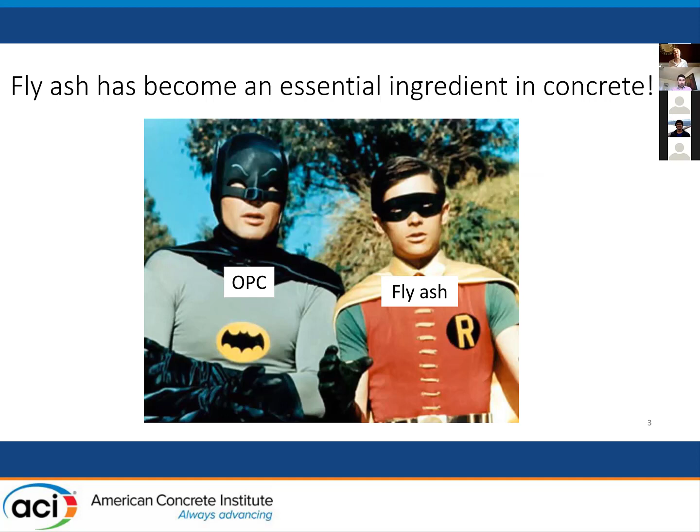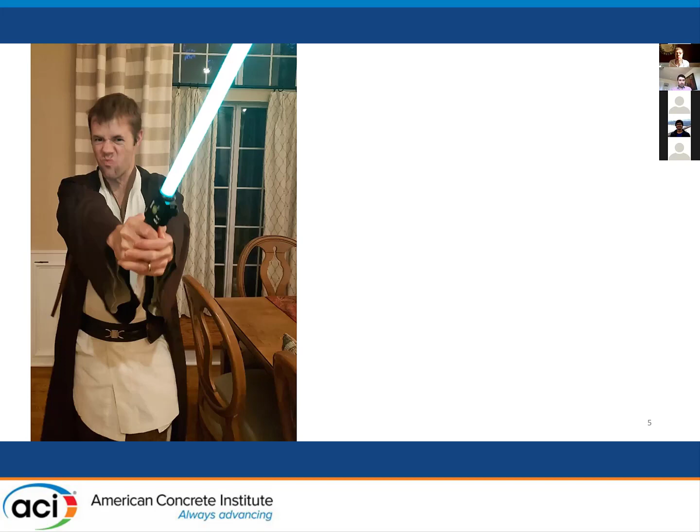So fly ash, as you know, is an essential ingredient in concrete. You could say it's like Batman and Robin, right? You could say it's like Han Solo and Luke Skywalker. And I have to warn you just a second that I'm a massive Star Wars fan. I have Jedi robes, I have lightsabers, I hang out with Wookiees, so you might see some more Star Wars coming up from me.

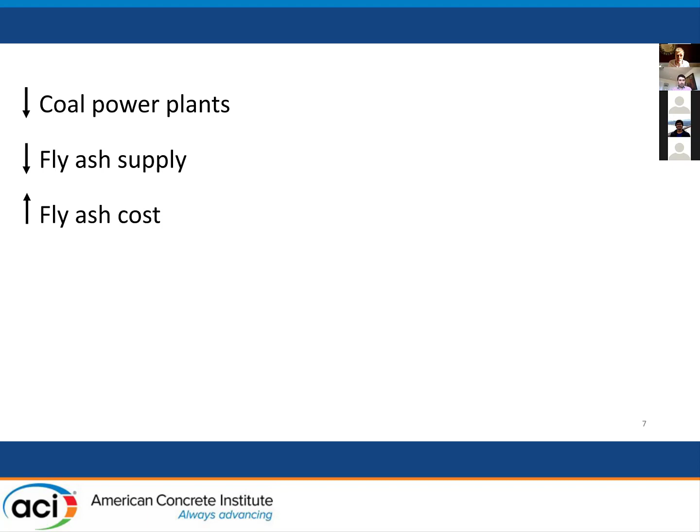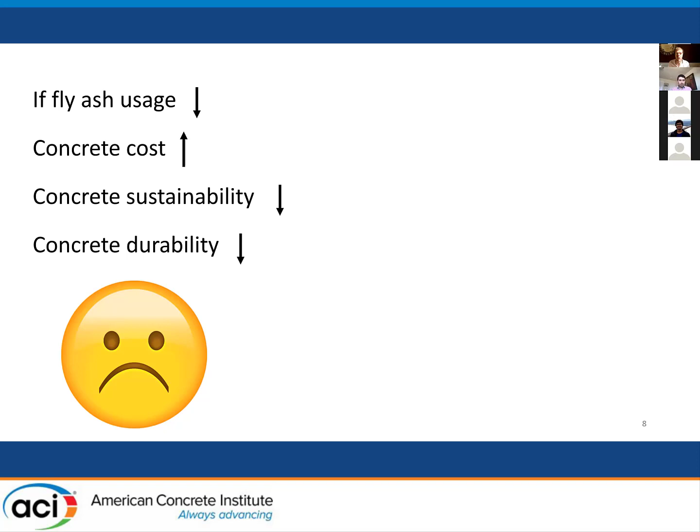But as you know, coal-fired power plants are going away. Fly ash supply is going down. Cost of fly ash is going up. This is scaring people, right? Fly ash usage has the potential to go down. This could make our costs go up, our sustainability go down, our durability go down. Oh, no, no. What are we going to do? This sounds scary and crazy.

Oh, no. You know, people out there are saying, you know, use other pozzolans, and I don't disagree with that. I think those are all good things. Slag, silica fume, natural pozzolan, calcined clays are great alternatives.

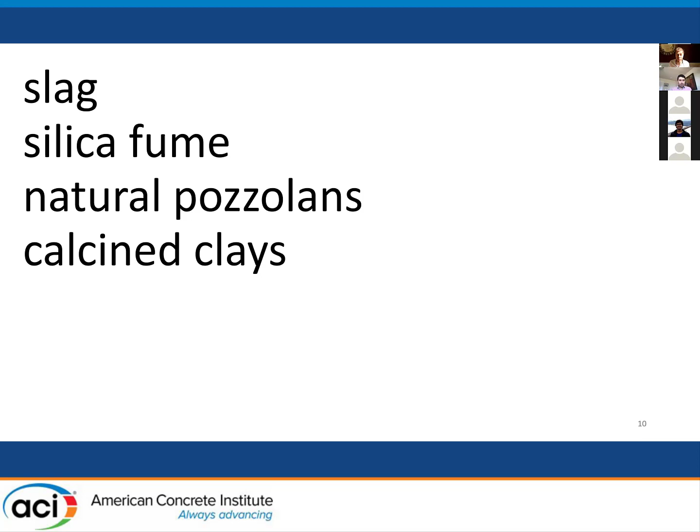But ladies and gentlemen, did you know we got something else? Did you know we got the backup fly ash out there? You know, the backup fly ash. What's the backup fly ash? Did you know the United States only uses about 40% of the fly ash that's being produced today, and it's been doing that for decades?

Tom Adams is going to talk more about this in the second session. Make sure you check him out.

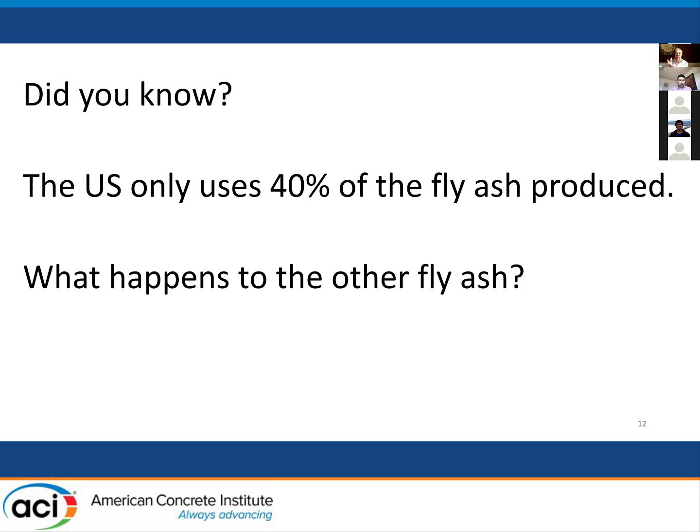So what happens to all this other fly ash that we don't use? It ends up in landfills, storage facilities, things like that. And this is the backup fly ash, ladies and gentlemen. This is good stuff, and I'm going to talk about a bit about it today. There's 2.5 billion tons of usable fly ash that's buried or in holding ponds in the United States. If at our current usage level, that's 170 years worth of supply. To say that there's no fly ash out there, that's not quite right. But the future of fly ash, I think, is going to be very, very different.

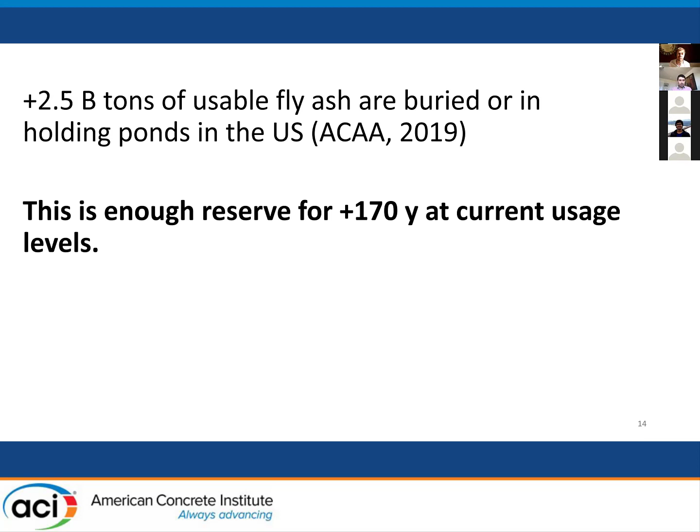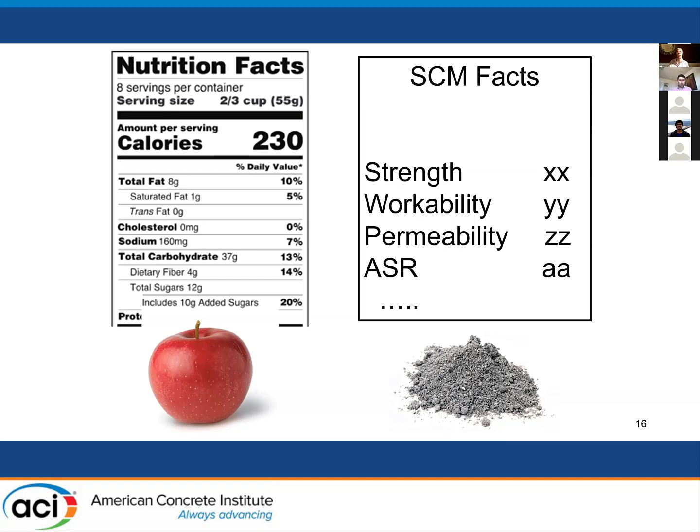And we're going to be using artificial intelligence to predict fly ash. I do a lot of other stuff, right? But we're going to be using artificial intelligence to try to predict this. That's tied to real performance value.

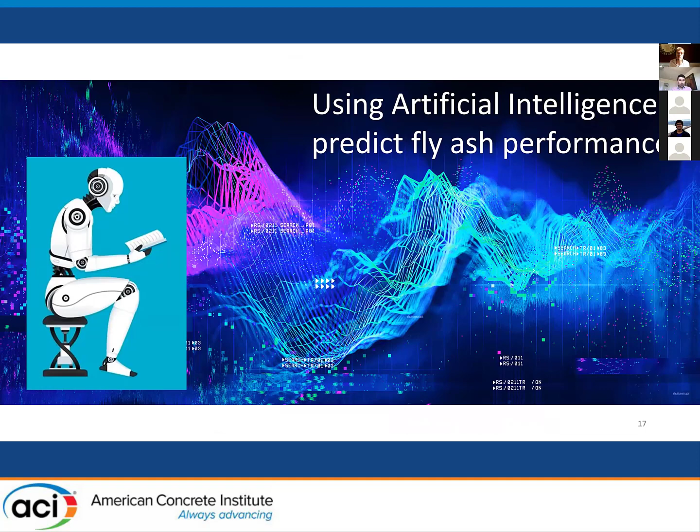So we're going to take a different approach. You know, see some out there, and we do this as well, that make very, very precise predictions using artificial intelligence models. These are great, and for their data sets, they usually work well. But when you go out into practice, there seems to be variability just in concrete that starts to really plague some of these models. So instead, we focused on grouping performance into high, medium, and low, and we said, hey, what if we could do this by only using the bulk oxides, the only bulk oxide?

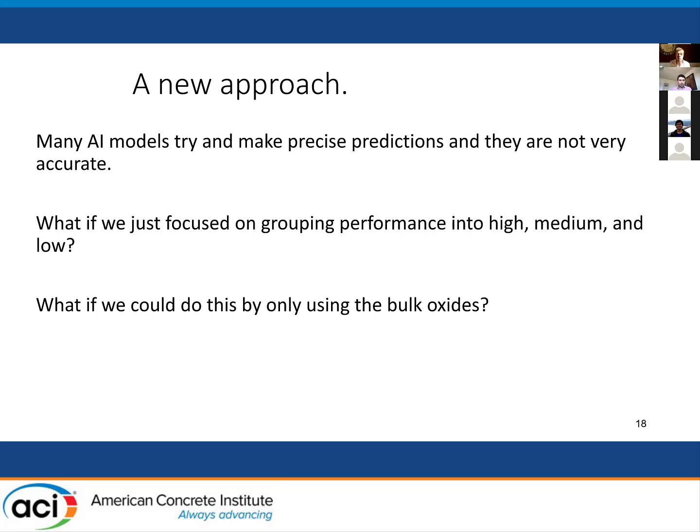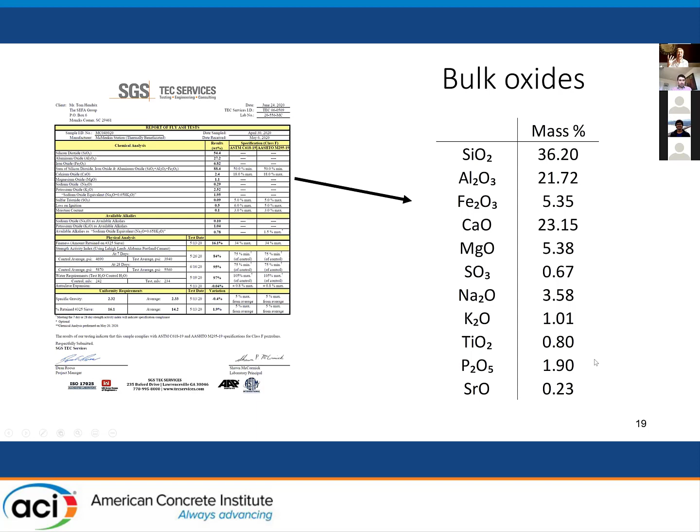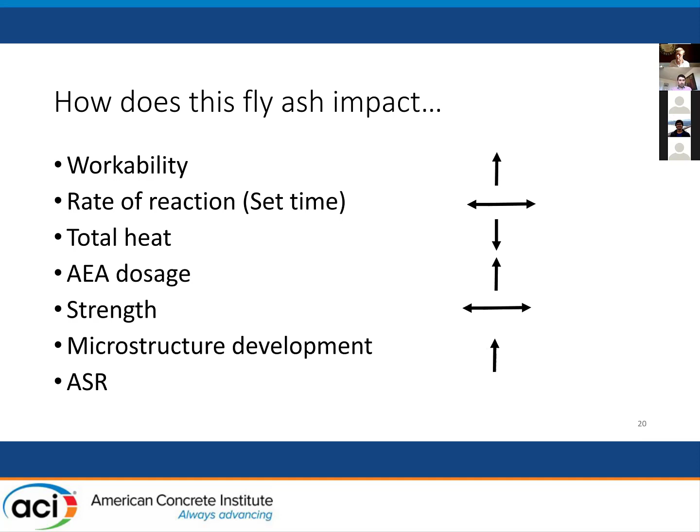We have more complicated models, and I'll show you some data later about that. But what if we could use only the bulk oxides? What I mean is this: you get your sheet of fly ash with this type of information, and you use that to predict performance. It's not going to give you the exact strength, but it will tell you if it's high, in the middle, or low, for a lot of different parameters. I think we can get to all of these parameters, and I'm going to talk about some of them today. Wouldn't that be cool? I think that'd be cool, totally cool.

So what I'm going to do here is talk about a subset of the data where we compare fly ash performance to mixtures that only contain Portland cement. That means a mixture with straight Portland cement versus a mixture with 20% fly ash replacement and 40% fly ash replacement. I'll get to that in a second. And we're going to break this into 3 separate classes: Class 1, Class 2, and Class 3.

Class 2 would be the same as Portland cement plus or minus 1 standard deviation, because every single test method has variation. So that's Class 2. Class 1 would be Portland cement minus 1 standard deviation, so lower than that. Class 3 would be Portland cement greater than 1 standard deviation. If that doesn't make sense, think of it as less than OPC, the same as OPC, or greater than OPC.

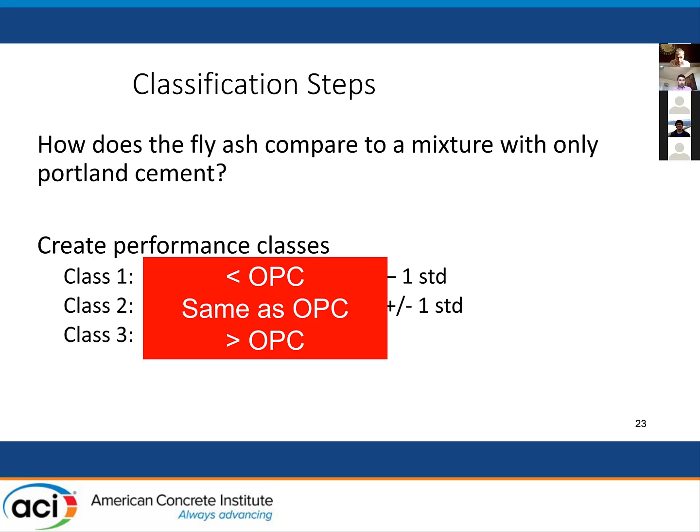We're going to use 19 different traditional fly ashes for the data I'm showing you today, but I'll give you some secrets here: we're up to 30 different traditional fly ashes, and we're up to 14 different reclaimed ashes. Things are looking really, really good with what I'm about to show you today.

But we're going to test this in concrete. We're going to make a 0.45 water cement ratio, type 1 cement, 1 coarse aggregate, 1 fine aggregate. We're going to measure compression strength and diffusion coefficient for the data I'm going to show you today. But don't worry, we got a lot more data coming down the chute.

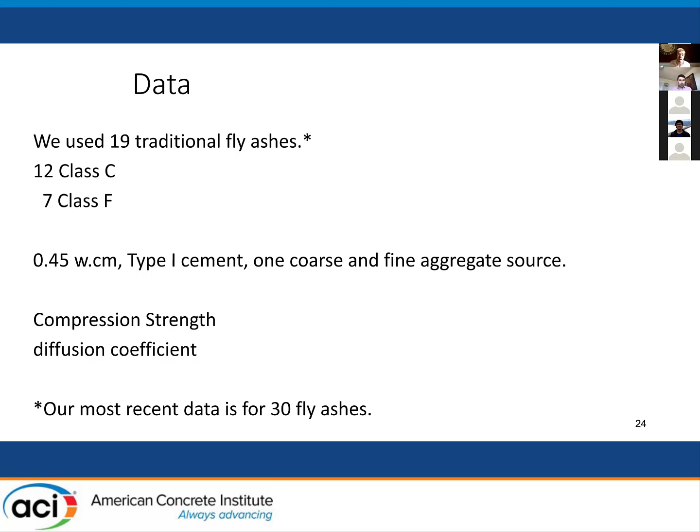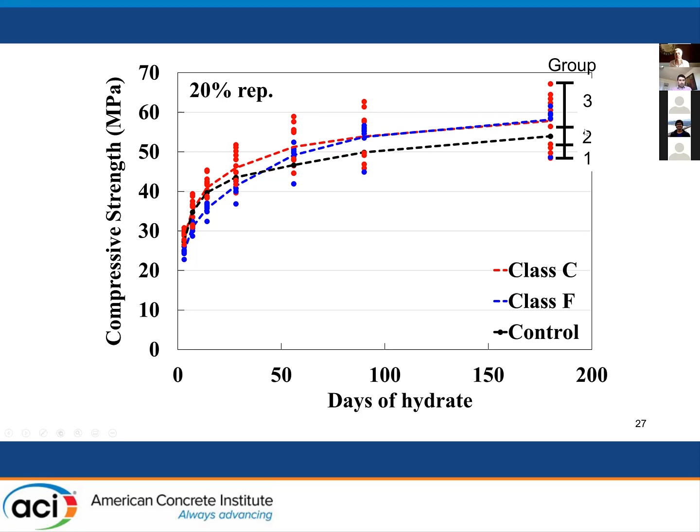But what we're going to do here is focus on different days. We're going to predict performance at different points in time, and we're going to look, say for example, at 180 days here. We're going to break it into group 3, group 2, and group 1. Remember, group 3 is better than Portland cement, here's our Portland cement right here. Group 3 would be better than Portland cement plus 1 standard deviation. Group 1 would be worse than Portland cement, minus 1 standard deviation.

So we're going to use something called Kernel Principal Component Analysis. Now, I have used 8 or 9 different machine learning algorithms. I'm so blessed to work with someone who's been doing machine learning for about 2 decades. He is extremely good at this stuff.

And we're going to examine all 11 bulk oxides, all right? And we're going to use something called leave-one-out cross validation. That means we're going to use 18 of the measurements to train a model, and then check it to see how accurately it predicted the one that I left out.

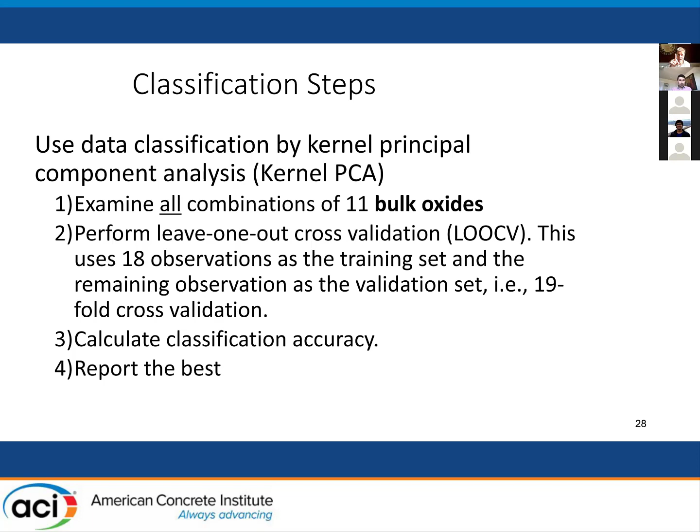And then you do it again, and again, and again. You go over and over, and every single time you ask: how accurately did it predict that one I left out? We report the best result from that process.

So here's the question: is the mixture less than OPC, the same as OPC, or greater than OPC? We're looking at compressive strength, with a 20% replacement and a 40% replacement, across different days. At 7 days, it was 89% accurate for the 20% replacement level, and 95% accurate for the 40% replacement level.

Now, this is for 19 fly ashes. When you get up to 30, these numbers jump up to the low 90s — we're looking at 93 to 95% accuracy. That's pretty awesome, using only the bulk oxides.

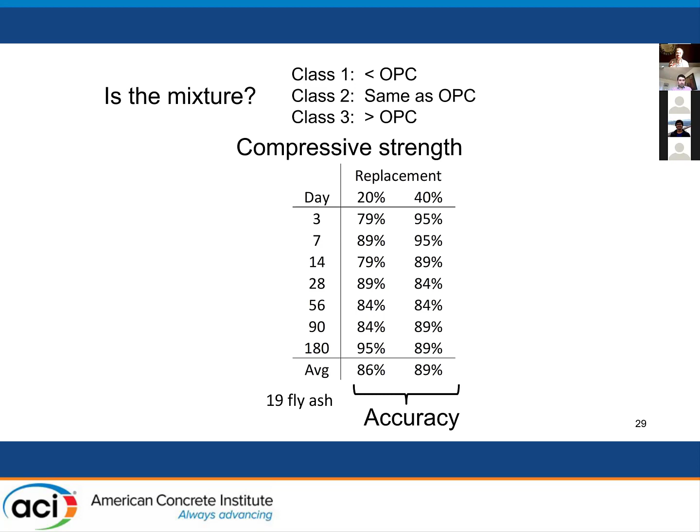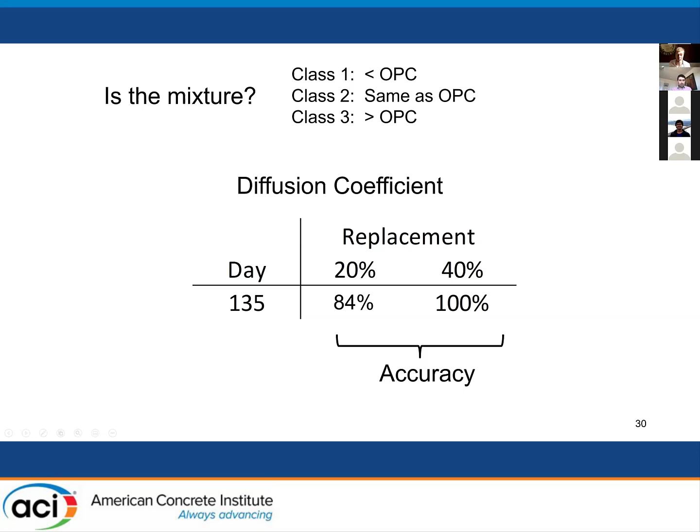Pretty neat, huh? We can actually predict diffusion coefficient as well — the rate at which ions penetrate inside our concrete. With 20% replacement, we're at 84% accuracy, and with 40% replacement, we're at 100% accuracy. So the Kernel PCA analysis is able to use the bulk oxides to group performance for fly ash at 20% and 40% replacement levels for these 19 raw ashes I showed you today.

But don't worry, we're expanding to reclaimed ashes, non-standard ashes, and lots of other materials, and everything's looking promising. It's just not quite ready for prime time, but it's super close.

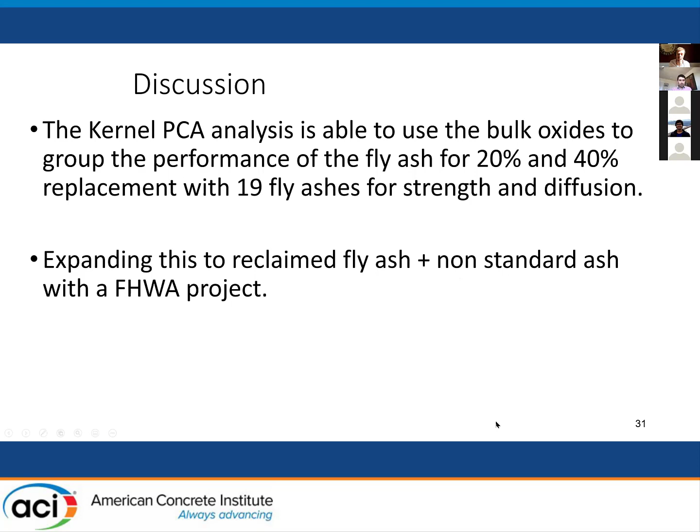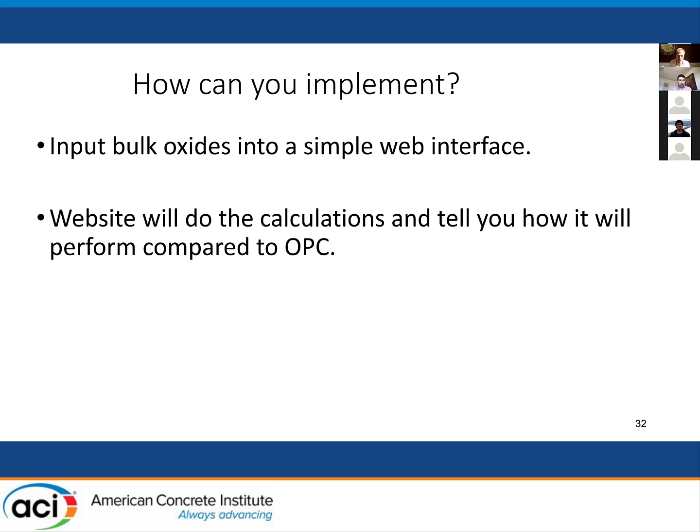Everything's looking really good. So how would you ever implement this? I'm going to give you a free tool today that already works well and is going to get better and better over time, where you input the bulk oxides into a simple web interface. The website will do all the calculations and tell you how it's going to perform compared to OPC.

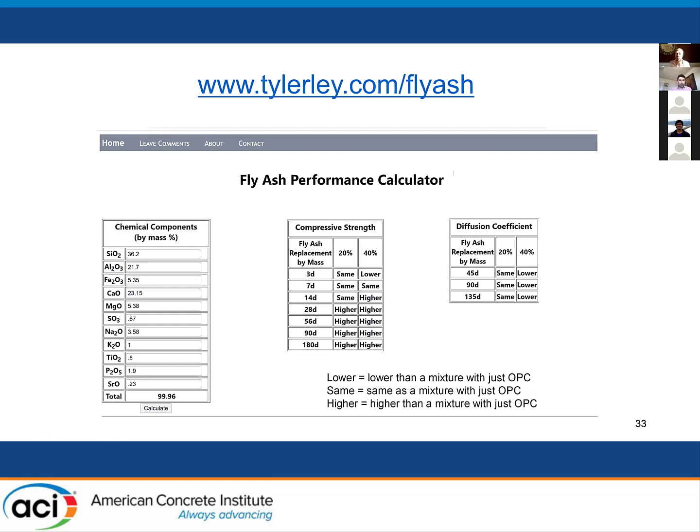This is live. This is ready to go. This is free. You type in your bulk oxides over here, hit a button, and it makes sure that you're actually using fly ash, and it calculates: are you the same as OPC, lower than OPC, or better than OPC for compressive strength and for diffusion coefficient?

Now, how would this ever be used? You could better predict high volume fly ash performance inside of concrete. You can substitute new fly ash sources without doing a mix design — I'll talk more about that coming up. You can look at blends of fly ash; producers are already using this to look at blends, and it's working well.

Or allowing fly ash that doesn't meet current specifications. What? Well, ASTM C618 requires a lot of little bits and pieces that isn't true for all sources of fly ash, and we're finding many of these that don't meet that standard still work well within a certain framework. I'll talk more about that in future talks.

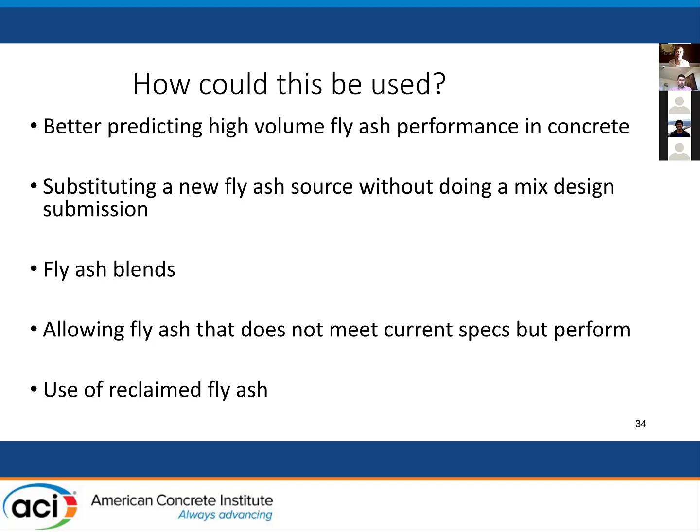And the use of reclaimed ashes is again looking extremely promising, and I'll show you just a tidbit of data about that at the end, because Farshad asked me to.

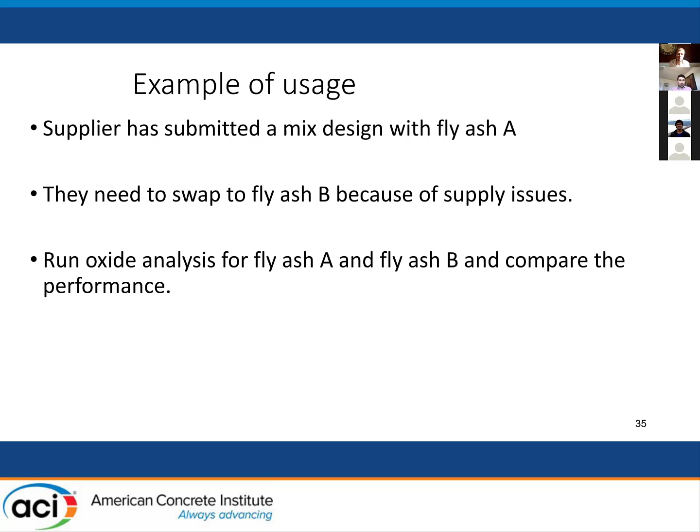So here is an example: a supplier has submitted a mix design with fly ash number A, and they need to swap because A isn't available anymore. Sounds familiar, right? What they do is run the oxide analysis for A and B — they probably already have them — then put them in the website and compare performance. If the performance is the same or better, allow the change, allow it to go.

If the early age strength is lower, then maybe require them to decrease the water cement ratio. If the permeability isn't quite what you want it to be, then increase the fly ash content or possibly decrease the water cement ratio.

We're using this knowledge and what we already know about concrete to make wise decisions on how to deal with these challenges. That's what engineering is all about, right? And this is just a tool to help you get over some of the hump.

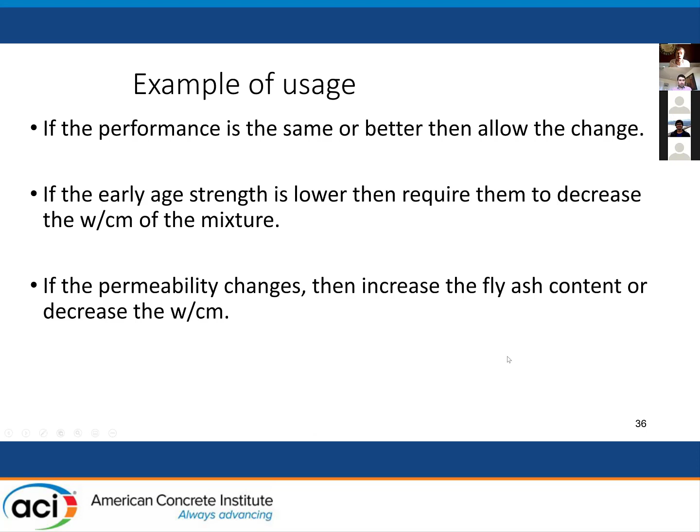So how will this be helpful? This gives us deep insights very, very rapidly. And this is way better than just Class C or Class F. We're about to enter a new era of fly ash, baby. And we need all the help that we can get. So why does this work?

Well, for one reason, the particle size distribution is pretty consistent between these ashes that I've looked at. Particle size distribution is going to be important when it comes to reclaimed ashes in the future. And we're going to need to watch into that, because when some of that material becomes reacted, it conglomerates, and we need to understand that.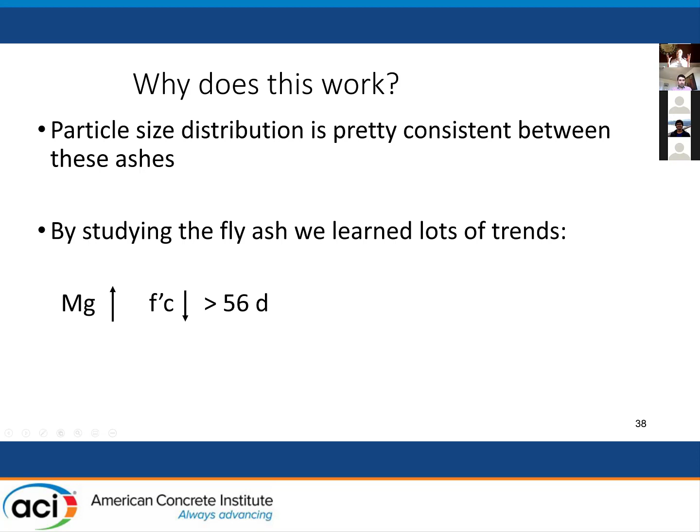But we've also done deep studies into fly ash before. We've been studying fly ash for more than a decade, and we've learned all kinds of generalities, like magnesium content, believe it or not, does impact strength. And we've used machine learning to take all of these learnings and put it into one simple tool.

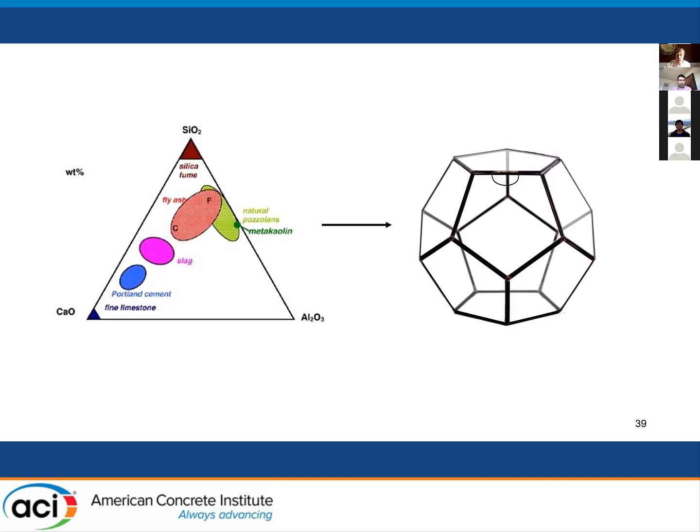Maybe you've seen this. You've seen a ternary diagram with silica, calcium, and aluminum, where people like to plot different SCMs. And different SCMs fall into different categories. Ladies and gentlemen, we have like an 11-dimensional ternary diagram, or whatever it is. And what we're doing is the machine learning is finding planes within that diagram that predict performance based on chemistries. We've published lots and lots on this, lots of papers out there where we've talked about some of this stuff.

So what's next? We're adding more data to the algorithm. As we speak, set time prediction is going to be coming out before you know it. Total heat - so if you want to do mass concrete predictions, we've got it in the bag. We're working on it, it's coming out. A resistivity model is ready to go, but I'm scared to put it out because I'm not sure if people would use it correctly. We're working hard on ASR.

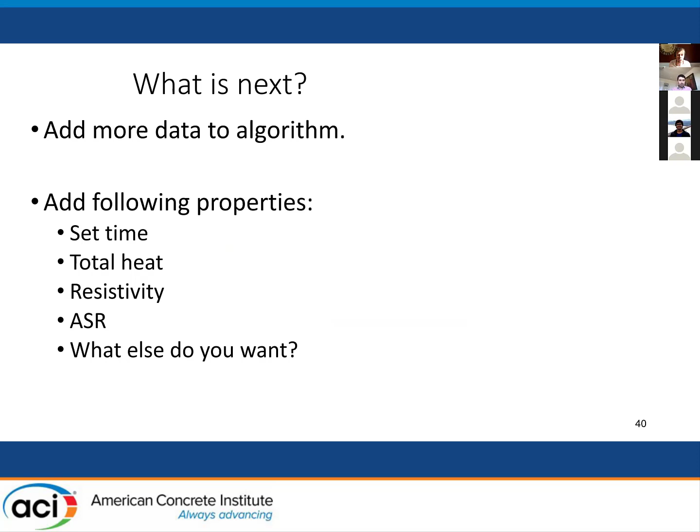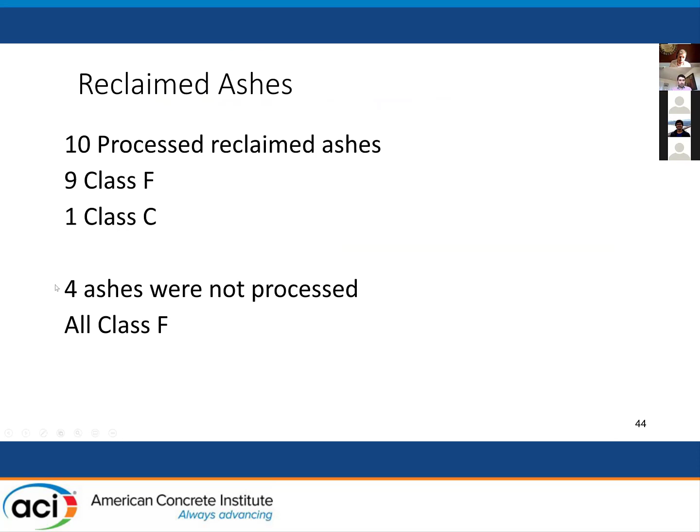So I'll tell you what, I think the future is bright. I think there's many tools.